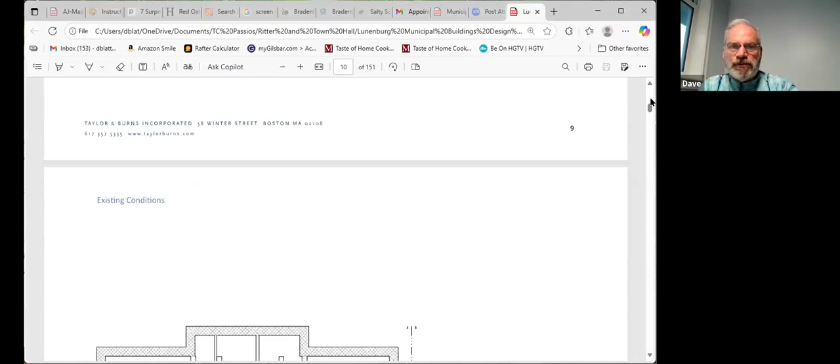All right, this is the way the town hall looks today when you walk in. You walk in, you have the assessors here, town clerk in the back, town vault. You come down the hallway and there's the treasurer and accounting departments in the background. When Taylor and Burns did their proposal on cost, this is what they proposed for the first floor of town hall.

You walked in, there was a conference room, an office, some storage, I assume for chairs and tables. You had a large 730 square foot conference room over here, and then a third conference room where the assessor's office is. They put in the elevator, more storage, the two separate ADA compliant restrooms and things of that sort.

My personal feeling is I don't need to change it that much. The only thing I might do is look at this conference room, because one of these offices could be Veterans Affairs, with a meeting room for Veterans Affairs in this general area. Hey, Dave, I think we need to keep Veterans Affairs away from Town Hall. There's no parking, most of them are ADA, and they're very, very loud.

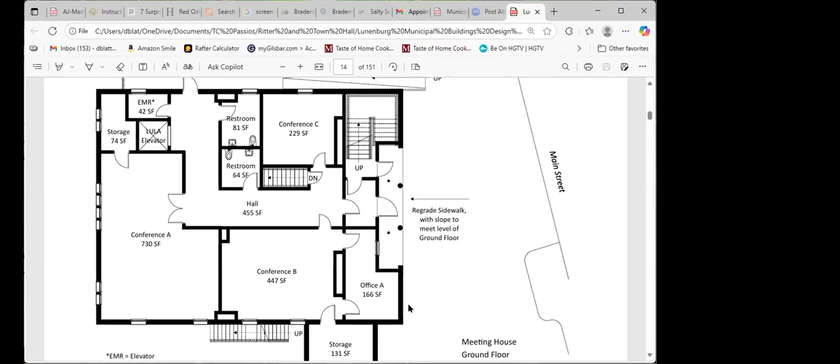Gotcha. Okay. Spoken from personal experience, about the loud part, not the other part. Yeah. Yes, it's a good thing I've been through all the HIPAA training because I hear everything. Okay. All right.

So office A, who knows? I still could see it as an office. Maybe it's a floating office, maybe for you, Chris, or if we still have to do something for our state rep. But I was looking at this as not really being much different. Anybody's thoughts or comments? I think the only concern would be if the select board is meeting on the first floor, does conference room A need to be bigger?

So Brian, the idea is that between conference room A and B, this wall moves. The wall gets stored away into this little cubby hole here, and you can have a large joint conference room. However, the other idea is that if you knew a meeting required that many people, we'd move it to a different building or location. Think about in your years on the select board, how many meetings you had with more than 15, 20 people there?

Yeah, probably, that's not fair. You're taking off the second glove. Thanks. No problem.

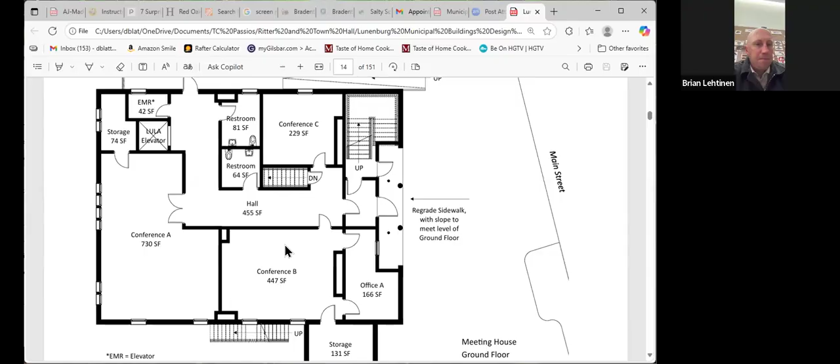So anyway, that was the thought. And the hall doesn't have to be this way. The configuration can be different, but I'm just showing a configuration that looked like it fairly worked.

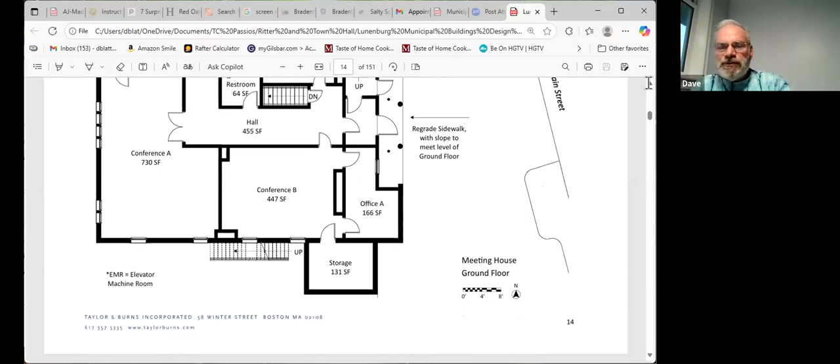If I go upstairs, any other thoughts on this first floor? I think, first of all, I don't like hardly anything that Taylor and Burns did because I think they just absolutely positively weren't very good at this project.

But I think one of the biggest issues is everybody has said we don't want a chairlift in Town Hall or Ritter. So I think the first thing you've got to do when you're looking at layout is where's the best place to put a new elevator shaft? Is it in the front of the building? Is it in the back of the building? Is it outside the existing footprint? I think that's the number one issue that needs to get decided before you can start divvying up space on the first floor and the second floor.

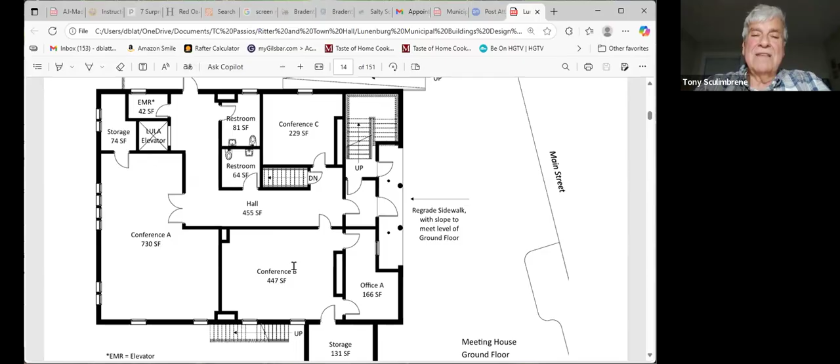Personally, I think the elevator ought to be as close to the front of the building as it can be, because the reason you're putting an elevator in there is to make it easier for people that are handicapped to get places. And if you bury the elevator in the back of the first floor, that requires them to travel to the back. In my mind, that is the first thing we should decide.

Okay, so if the elevator was in part of Office A, with the door opening to the breezeway, it would work better in your thoughts.

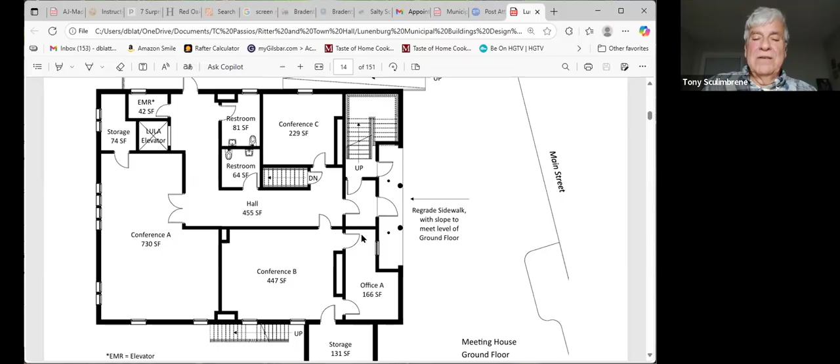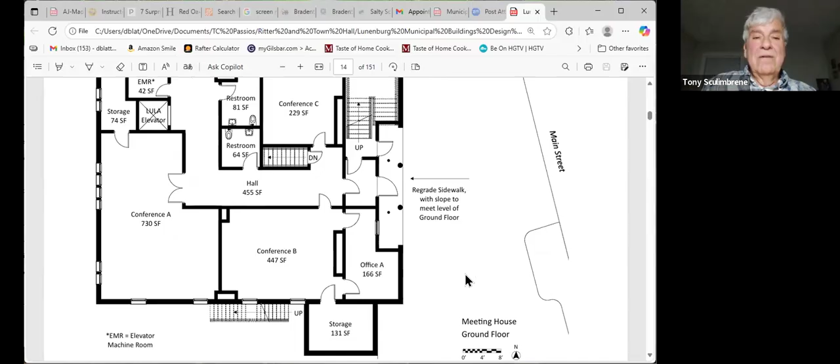Yeah, the other wild idea I had was to take the storage, which is the current town clerk vault, and modify that. I'm not sure what the footprint is, and I don't believe the dimensions are on these drawings, but could you start with that as your elevator shaft? In essence, we would be keeping the square footage at the ground level the same, but adding some square footage up to the second floor. But it's in the right spot, it's up front. Understood.

So as I said, guys, I'm just looking at this as a concept. I'm starting to try to move us into different concepts, different ideas, and just get us thinking about whether things could work or not.

Look, it could be that this wall between conference room A and conference room B is shifted way over to the corner, and conference room A is the first conference room when you walk in. There are other ways of skinning the cat, and maybe there's a conference room D if we needed it. But to me, it gives some nice size meeting rooms for different size groups.

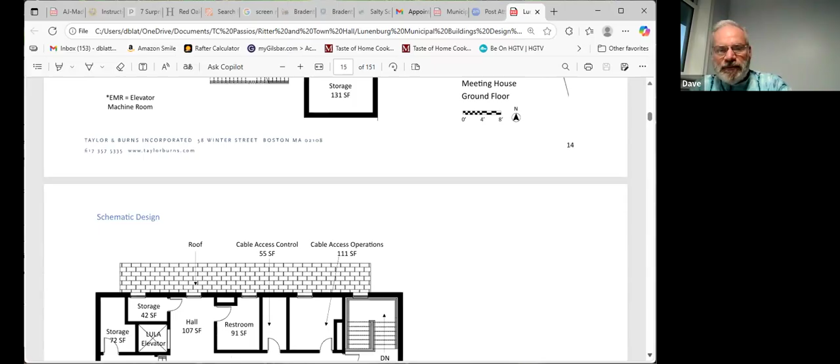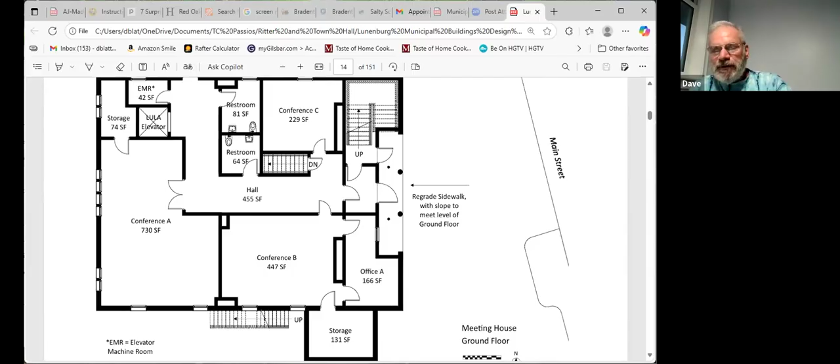If I go upstairs to the second floor, this is what they had and what they did. Once again, we're talking about what they did. They had the hearing room that's there now, minus the stage, and it is 1,350 square feet. Brian, to your comment earlier, if I add my 730 and my 447 together, I'm at about 1,200 square feet. So not that much different, but it is different. I'm definitely in that mode.

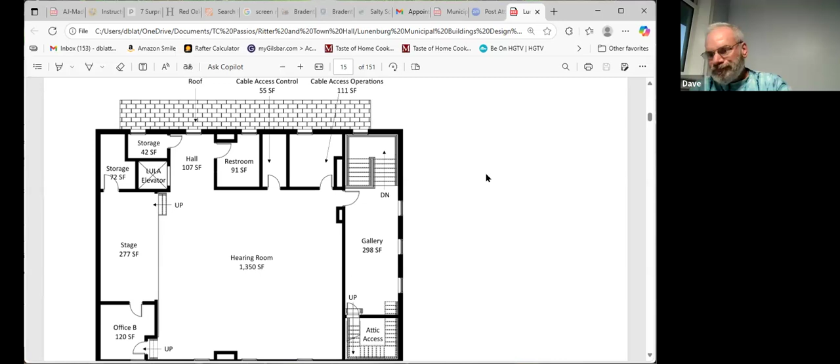They have the office, we have the storage, we have the studio for PAC. What is that other one? Oh, cable access operations. So it is what it is. This is the second floor, okay?

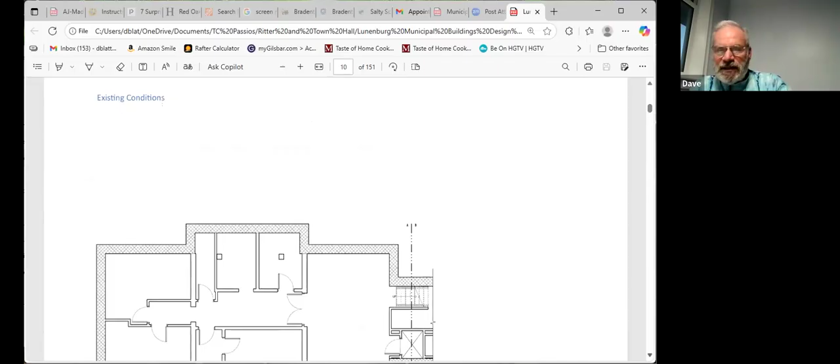If I move over to Ritter today, it gets a little bit more confusing. Oh, hold on, wrong direction, sorry. Okay, so here's Ritter today. Lower floor. I'm assuming Chris Ruth is down here. Veterans Affairs is right here. Am I right with this one? Yeah, this is the lower floor conference room.

Kitchen. What is this now? Mechanical. There are two boilers in there. Two boilers? Okay. And the important thing to remember downstairs in Ritter is a lot of these walls are load bearing.

Okay, so any reorganizing, we're just gonna have to take that into account. So literally, if they just stay as offices and just get reconfigured, we're okay in a way. You know, I have a conference room here. So this is the lower level.

Can I ask a question about the load bearing wall part? Sure. Is it load bearing to the structure above based on where the walls above it are? So if we reconfigure walls above it, we would also have to reconfigure walls below? The walls above it, if you remember when you walked around there, most of those walls don't go to the ceiling.

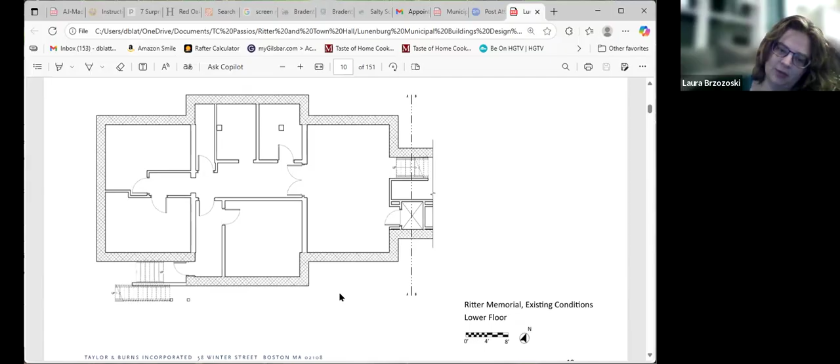And 2 or 3 building inspectors ago, he actually put all that in himself. So most of those walls can be just knocked down and moved. If they don't go all the way up, they're irrelevant. I think there's 2 main walls upstairs that do go all the way up that we'd have to look at. Okay, so it's mostly the weight of the floor and everything else. And we could reconfigure upstairs without having to reconfigure down, probably. Yeah, and we could reconfigure down. We just have to keep in mind that the more you reconfigure this, we're adding some structural costs there.

I mean, downstairs works. Chris, what is the floor structure? Is it reinforced concrete? Is it steel? Whether it's reinforced, I couldn't tell you, but I believe everything's concrete floors. Okay, that's what I was thinking. You mean the first floor, Tony, or the basement? First floor. That's probably just wood framed, right? I don't know, that's why I asked the question. We're gonna call that the lower level. The lower level is concrete. The first floor is wood. The addition's definitely concrete.

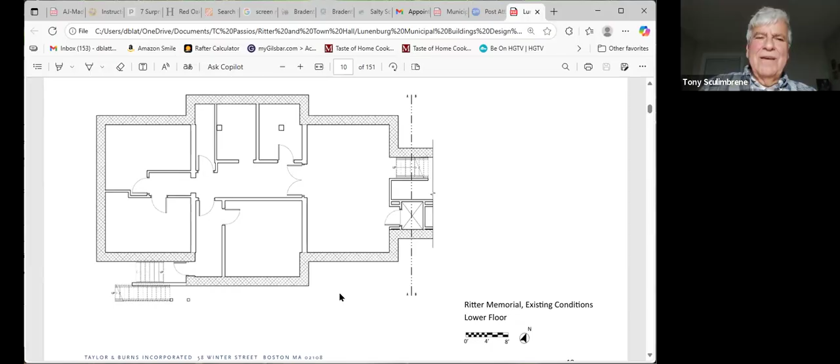The first floor, it doesn't feel like a wood floor when you're walking on it. It feels solid and smooth. Maybe it is a concrete deck. I wouldn't be surprised. I just assumed it was framed. That's a good question for us to verify, because it will have an impact. Yeah, I'll try and pull up a corner of carpet tomorrow and take a look what's in there.

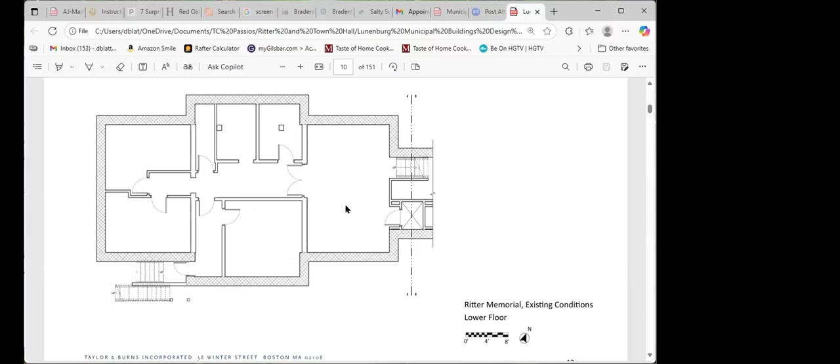Okay, and Chris, is it mostly the thicker walls in this picture that are load bearing? Or do you think some of the thinner ones on the inside will load bear? I think it's mostly the thicker ones because those are masonry walls. Yeah, those are probably the ones that are really load bearing. If you see in the top of this, there's 2 little boxes. Those are actually columns. Okay. Oh yeah, because that would be the outside wall of the building.

Is that drop ceiling in there downstairs, Chris? I can't remember. It's hard ceilings. Okay, yeah. All right, so that's the lower level.

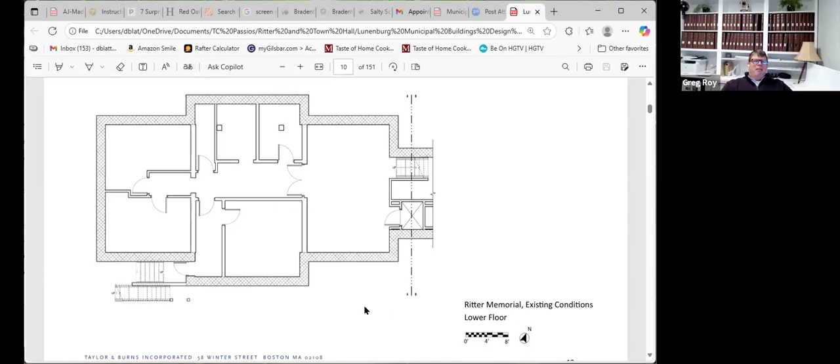We're calling it the ground floor, but this is the addition. Let me make it a little smaller so it fits on the screen. So this is the planning board meeting room, land guy, the admin office, the 2 bathrooms, and then the open area with the little countertop and the copy machine. So this is the ground floor of Ritter as it stands today.

Remember that I think it's 5 steps that you have to go up, 5 steps that you have to go down to get to either levels of the other building, and there's the 5 steps to even get up to the level of this Ritter.

Ceiling heights in the lower level, are they okay, Chris? Yeah, they're actually fairly tall for being in the basement. They're not bad at all. I wouldn't say meeting room for select board, but for offices it's not bad. No, not bad at all for offices, and I actually think the ceilings were built down more than they used to be, because in my office the windows swing in and they don't open because you hit the ceiling. Oh, that's right. The old wonderful dropping of the ceiling to add some pipes.

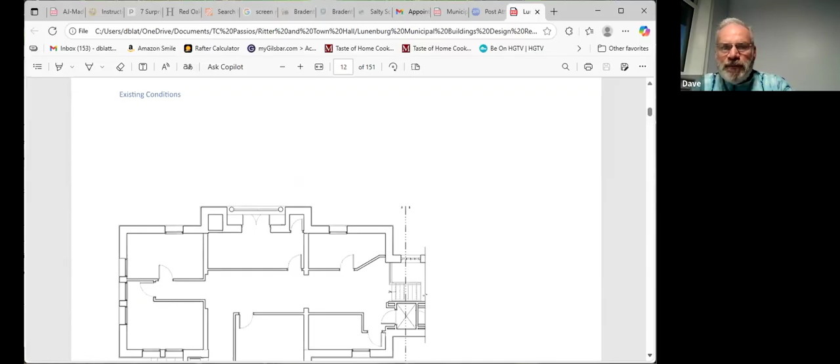All right. If I move up to the upper level, this is how we have it now. You come up, there's the deputy building inspector here. That's storage where your mouse is right now. The first office you were on was the rec director, which is currently vacant.

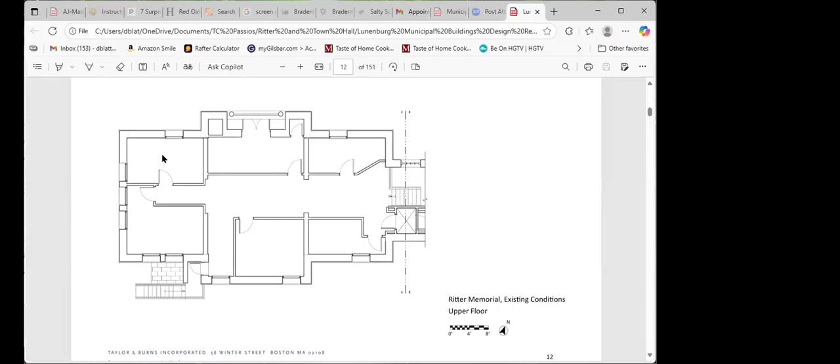The office to the left of yours is Brian's, where the fireplace is. Yeah? If you go straight up from there, that's the building admin. That is vacant until Wednesday. And then Board of Health and Conservation's the last one. Okay. And those thicker walls again are the load bearing ones that trace up from downstairs.

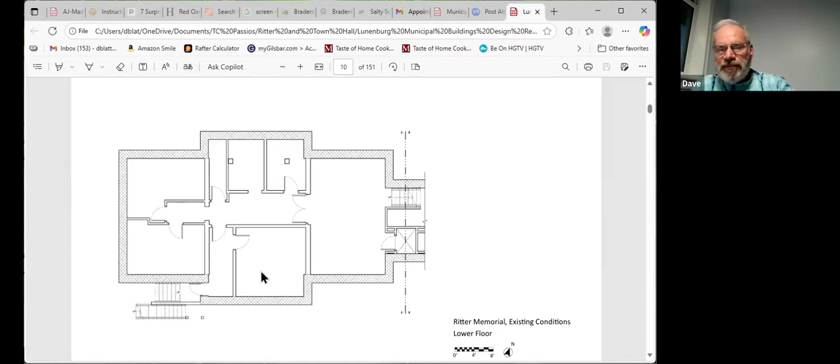Okay. Now, guys, one of the things I'd like us to consider as we look at this thing is that this is the land use pretty much that the town manager spoke about. It's the same footprint as the lower level. Right now, it is. The only thing we're missing out of this is the director, the land use director's office, and his admin. But other than that, you have conservation, Board of Health, building admin, and things of that sort.

So just as we're throwing things out here. As we move to the second floor, we talked about the offices with the fireplace. I would love to see that become a conference room, for when you want to really show off Lunenburg, and it would be a beautiful conference room. You have room here for the town manager, her admin, whatever you want to make here. I can see this being a common kitchen area or smaller conference room and other things.

And then, what we're looking at mainly to me is I'd like to see a 2-story annex on this side, on the opposite side of the present annex, that matches the floor plan, that matches the heights of the floors in the present Ritter, built on the other side, in the green on the other side.

Dave, if you do that, you create a problem with access because of the '65 addition. And that was the fundamental mistake that Taylor and Burns never addressed as an architect. And it was why we had an elevator in the new building in the annex and a LULA where the current LULA is. So Tony, I am eliminating the 1960s building completely.

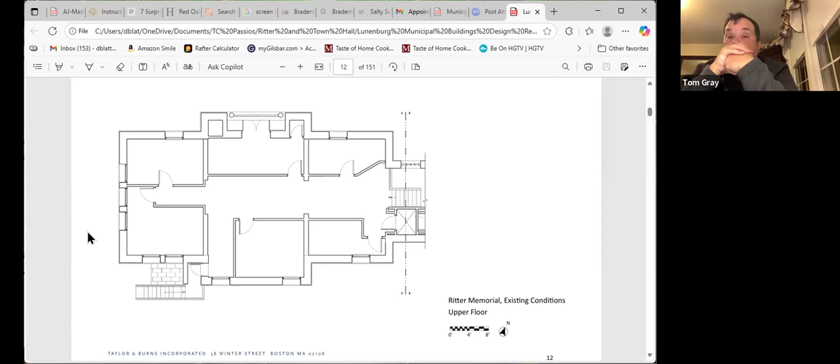And what's interesting about the annex is that it has good, strong, stout walls that are very high. If you look at the ceiling height in the addition, it's probably 12 feet, if not more, which is one of the contributing factors to why poor Marjorie and all the other assistants who have been in that space are cold, because we replaced the baseboard heating with mini splits that are at the top of a 12-foot high wall.

If you tear down the addition, you could have a single elevator to the south of the Ritter building, but you don't know what's over there. Whereas if we concentrated on keeping the addition, we know exactly what's on the addition side. You could do so much more by looking at how do you make the building completely accessible in one spot, starting with the '65 addition.

Now, this is something I tried to make this point when we were dealing with Taylor and Burns. I'm not a proponent of saving the addition for any historic reason. I just look at the '65 addition as a place to bring this multi-level facility up to ADA compliance the easiest, quickest, and cheapest way to go. But Greg, so you're a civil engineer. What do you think of that idea?

Yeah, I think it has merit. So correct me if I'm wrong here, Tony, you're saying, if I'm understanding you correctly, doing what we need to do for the building modification in the footprint, or maybe not the exact footprint, but in the area of the '65 addition. So maybe that needs to be 2 stories, but we do it on that side. That's what you're saying? Yeah, yeah.

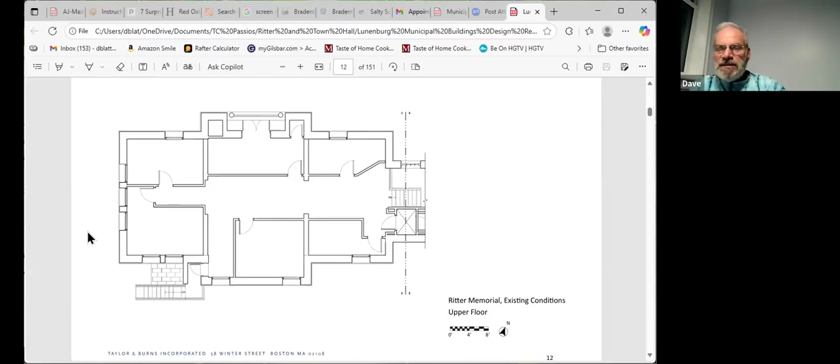My only concern on the annex is that I'm looking to eliminate steps to get into the annex and eliminate the stupid transition of floors from the annex to the Ritter. If the annex as it sits today, that floor can be altered in height, and we keep the building, I'm all for it. But if not, that floor that sits today needs to go, and it needs to be equal to what the Ritter is today on both floor heights.

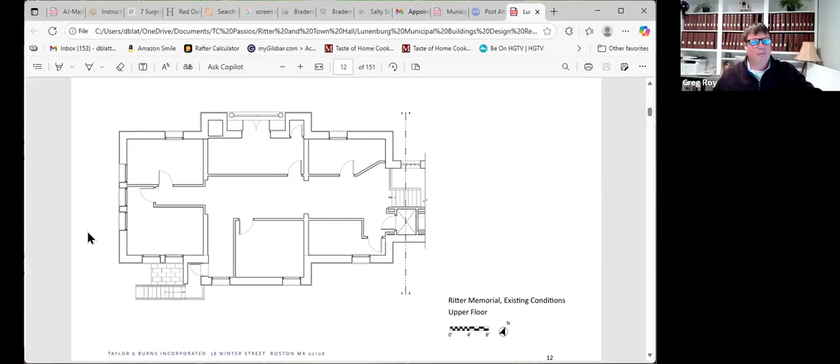Tony, I haven't really looked at that. Do you think that you could make the grades work? I'm assuming you mean put a basement in. So if we were to, just hypothetically, take the annex off and reconstruct it so that we have a basement in it matching the existing basement, is that what you're talking about? What I've been saying is you take where the steps are, going into the building, over towards the property line that's to the east, and you cut that part of the building out. You cut out the steps that go up, and you cut out to the point where the steps go down and then go up.

You get rid of all of that. You have a major demolition so that basically all of what's on the screen here, you take off. Yes, okay, I'm with you. Yeah, you keep it, so where the bathrooms are, that might be where the elevator is, and where the steps and the double doors are, that may become an entry at the same grade as the lower level into the building. Okay, that's what I was asking.

Because here's one of the biggest issues, Dave, why I want to stay on this side versus going to the southern side of the building for the annex. Everything that you do over there requires an excavation below grade, whereas we know what the conditions are right now at the entry level, where the parking lot is. There's no digging that has to be done to get to that level. You could be at that level just by removing foundation walls to get into the lower level of the Ritter building.

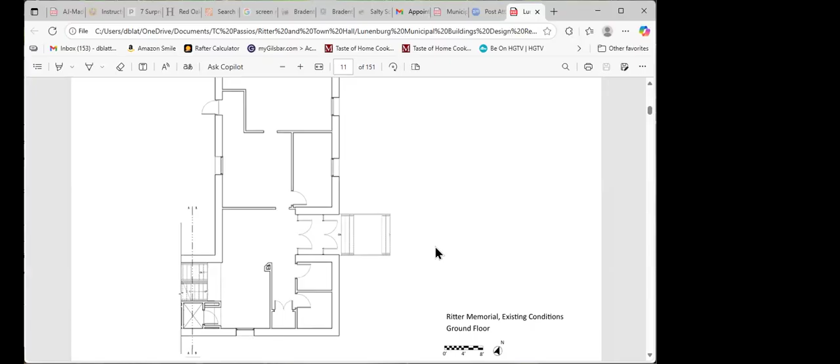I think the other thing we need to remember, guys, is we need to pick either the lower level or the upper level that we want to be level. Any new thing that we're going to attach to it, the height from the basement to the first floor is never going to match. So we're either going to have a ramp in the basement or on the first floor. Yes, absolutely, that's true.

I feel like the 1960s annex right now locks us into this 3-level multi-tiered thing where you're going up 3 stairs to go into the building, and then you'd have to go down 5 steps to get to the underside, whereas if we were to replace that annex with something, we would mitigate this multi-tiered level issue, and it would be a simple elevator that has a stop at the first floor and a stop at the second floor.

You still end up with a building that has 3 different levels, Laura, whether you're on the right side or the left side. Why? How? Because you would want to enter the annex at grade, and you can't. The addition is at the general grade of Ritter. And this is the reason why the annex had the sloping hallways and an elevator on that side, because we didn't address the fact that we still had a piece of the building at grade on the other side.

But no matter what you do, if you tear down the annex that exists today and build a new annex, if you want people to walk in there from the Mass Avenue level, then you are guaranteed to continue to have a structure that's got 3 distinctly different elevations, 3 different floor levels. You don't get away from it. And that's the reason why I'm saying let's use what we got, because we're not going to change it by switching it to the south side of the building.

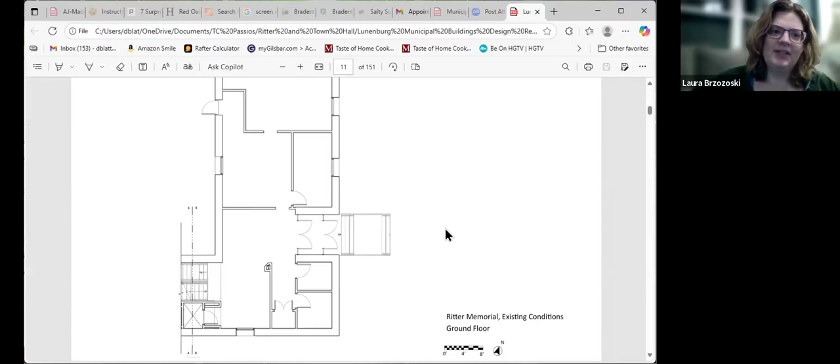So what I'm saying is that it's not at grade, and that we could have, if we sunk down the annex magically, sunk it down those 5 steps, now we're level, and you put a second story on top, which is also level. Yeah, well, to Greg Roy's point, you might not be able to be level. You might have to have a different floor.

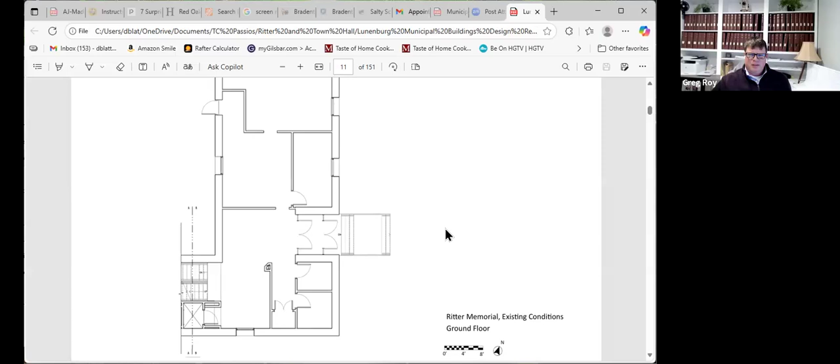But one step up is different than, how many feet of ramp do you need to go 5 stairs? Is that 36 feet? You're making it complicated, Laura.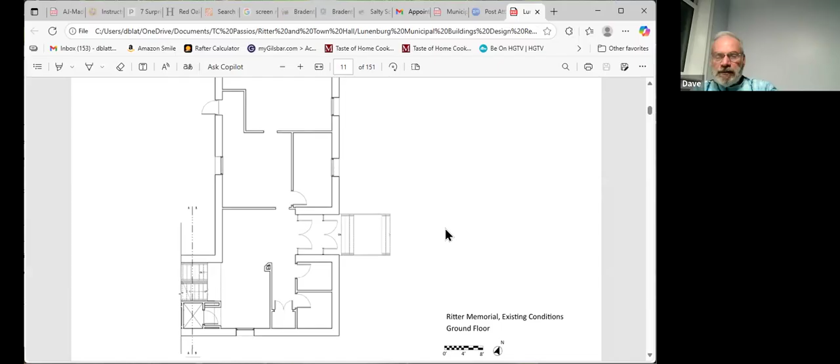Just think about where's the best place to put an elevator to get to 3 levels. 2 levels, no matter whether you have an annex. No, 3 levels. If we take the annex out of the picture, it's too low. You can't do the annex at grade on the south side. Why not? Because of the terrain. That's the issue. You go up 5 steps to get into the building.

This is the reason. If you go back and look at the Taylor and Burns drawings, when you walked off of Mass Avenue and you went into the annex, the only way you could get to the lower level was to have a ramp or use an elevator. Or to get to the upper level, you had to have a ramp or an elevator. Is that not correct, Greg? Yeah, that's true.

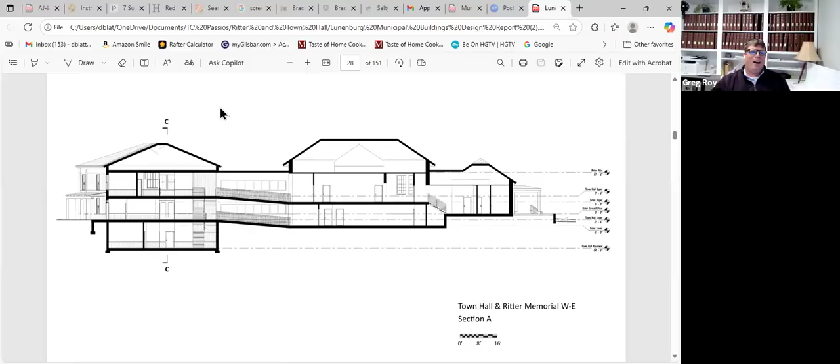I have the survey pulled up here that we did. The parking lot level, at the pavement level going into the current Ritter entrance from the parking lot where there's no ADA accessibility, I could tell you what the elevations are, but it's not gonna mean anything. It's almost 4 feet lower than where you go into the annex. And then you go back down the steps to the basement. But to Tony's point, you go up another 5 feet to the first floor.

And on the far side of the building where we had the annex before, the grades over there are like 6 or 7 feet below. So you have this problem, and you don't have the ability like we do on the annex side, where you could lower the grade to get in on the basement level from the parking. You can't really do that on the other side because of the way the grades are. Does that make sense? So if we put the addition on the other side, you're still gonna have this problem with access into the building on a split level type scenario, as far as I can tell.

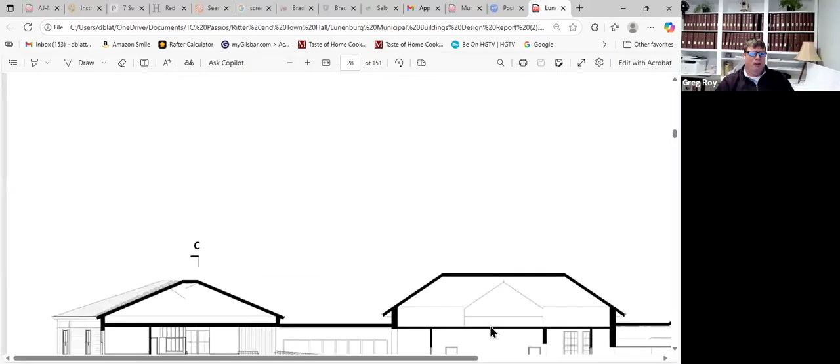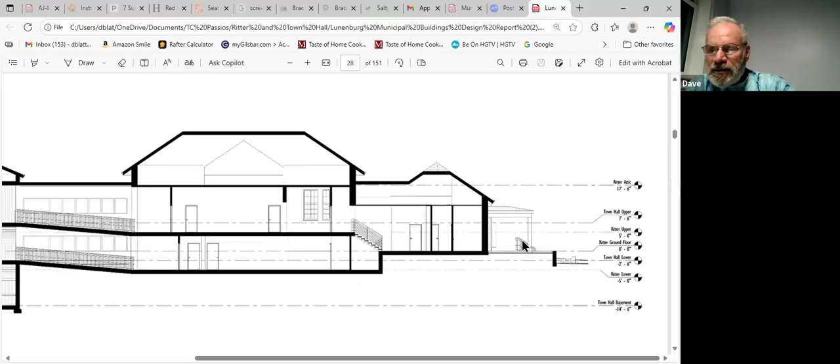Bear with me, guys. I'm gonna playfully disagree. All right. So right now, you're damn close, okay? The town hall lower level right now, they're saying -5 feet from what they were gonna do, but they had steps to get in. So I'm looking at this thing and I'm not that far off.

So if we dug down the parking lot on the current annex side, the entrance area there, if we dug down another foot, now we are at the lower level. I think you could do it. You'd have to look at the grades of the parking lot, but I think it slopes down. I think you'd have enough elevation to get that to work.

That's what I've been wondering. Oh, sorry, Laura. I'd be worried about drainage and putting what is essentially a basement on that floor, but I guess if there's gonna be flooding issues at Ritter, we would have already seen it. But if we dug down that parking lot and created a lower grade and made that the main entrance, some sort of corner thing, then we would have a new annex where the entry is at the lower level of Ritter, and the upper level of the old Ritter building is now the second floor.

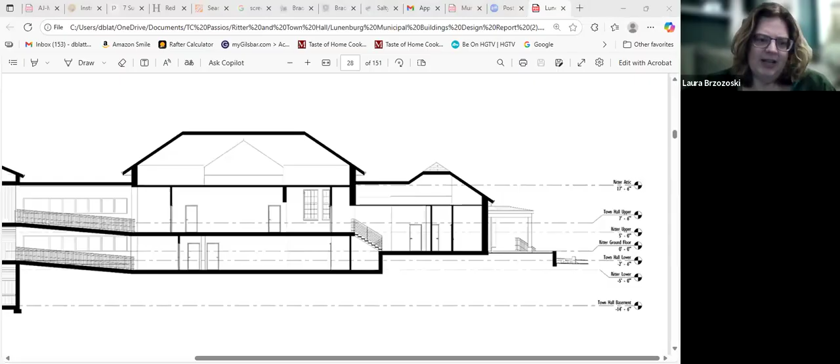And from these, it looks doable to me, but I am not a construction person. I would take Greg's word on it. But if we dug that parking lot out, we would be entering at the lower level of Ritter. Well, I think the grades are probably doable. The parking lot does slope over there. I think what we're not paying attention to is this annex side. There's 6 parking spots there, and they're tight. They're awful parking spots.

So even if that was true, the main entrance, what do we do about parking? You give up those town hall parking lots. Well, it'd be ADA only. Yeah, ADA, because town hall already has suboptimal parking. Yeah, those would be the handicap spots and we would have to find more parking. So that is an argument for putting it on the other side.

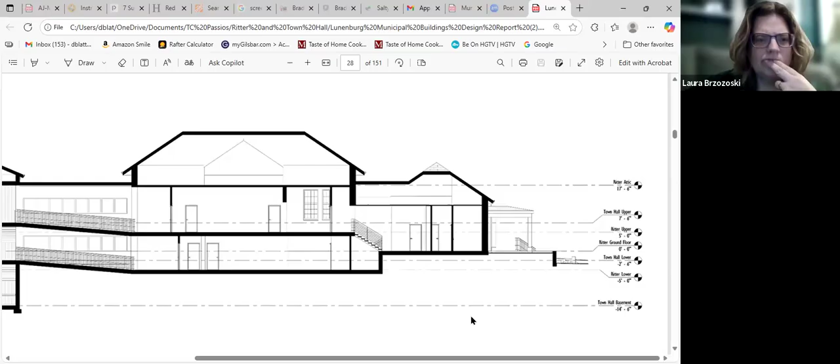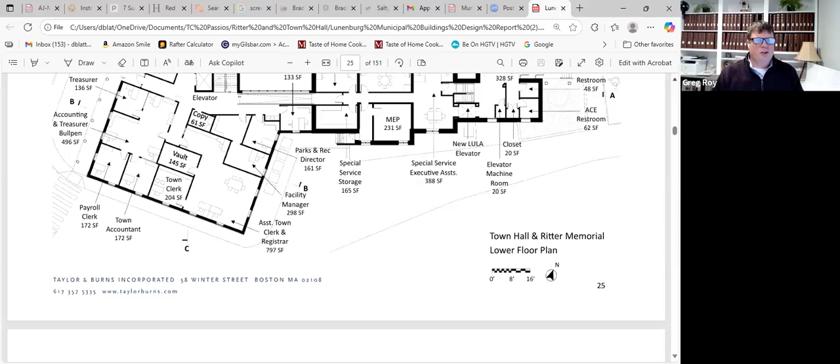On the other side, I would argue that grade should be at the second floor. I don't know why. Why didn't Taylor and Burns do that? Because it related to how it tied in. The annex was huge. And it went all the way out to Mass Ave and the School Street entrance, where School Street comes into Mass Ave. And in order to get the grades to work at that point, essentially, they tied the grades into the sidewalk right there. And so when you work that backwards, it comes in at midship, if you will, mid story.

Greg, is it better to raise up or lower down? Well, it depends on where you are in the building. If we were to do the other side, leave the existing annex the way it is and put the addition where we were planning it before, at the level of Ritter's, we're losing that stupid ramp. I don't think there's a feasible way to do that. You'd have to overcome like 6 or 7 feet of existing grade. I'm just gonna tell you what it is.

Sorry, 7 feet? Yeah, the elevation is really on the School Street side. The elevation of the grade there is roughly 575, so it isn't 7 feet, it's 574.8. And the threshold elevation, the second floor elevation, the top floor of the Ritter, is at elevation 580.6. So it's almost 6 feet. There's a lot of grade, and then it actually gets lower as you get down to School Street. So there's a lot of grade you'd have to overcome to only make that on that first level. You know what I'm saying?

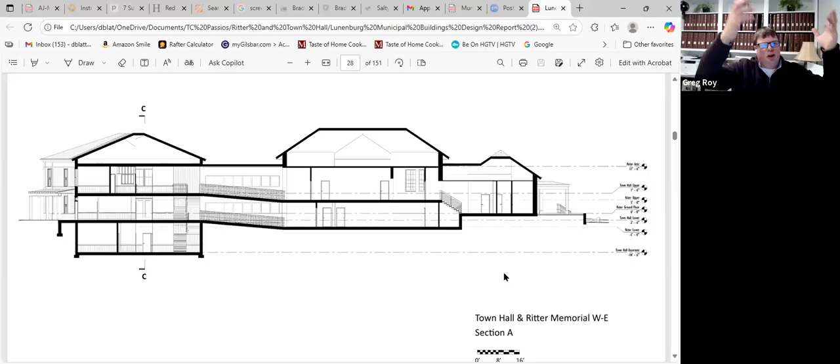And then you also don't have the ability like you have on the other side, where Lancaster Ave is quite a bit lower. It's probably, I venture to guess, a couple feet lower than the basement elevation of Ritter. So you would have an opportunity to regrade that parking lot and come in at the basement level with your front entry door, ADA, right in. And then to Tony's point, you could put your elevator in there and go up. Maybe you wouldn't do a full basement all the way and you'd keep some of it at grade so you could do a multi-stop elevator. That's what I was thinking you would do, Greg. It's certainly possible.

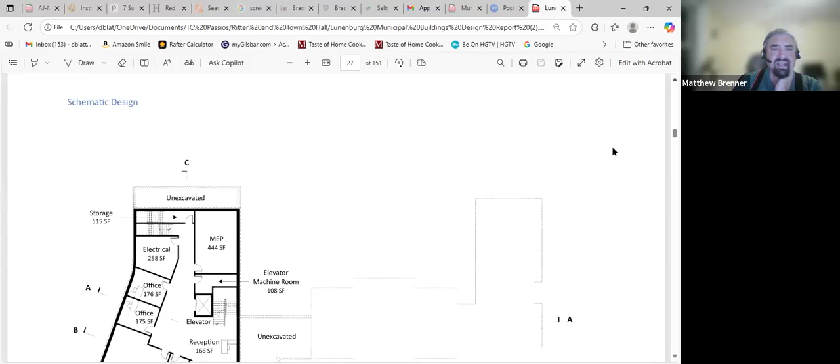And I see what Tony is saying for sure. We wouldn't be able to put all the parking over there. We'd have to have parking on the School Street side and another way in for folks from that, an employee entrance or something. Ideally, there's one entrance. Well, there'll be more than one entrance. Sorry, go ahead. One main public entrance is ideal. I understand what you're saying, Laura. We could have more parking than there is now, though. I mean, Ritter has 7 parking spots in that front area.

And there's no reason it has to only be 7 there. The parking lot could be bigger. And I mean, some of that parking lot layout is just limited right now by the current entrance. True, we could, I think, at minimum work in 3 more spaces without notably increasing the size of that parking lot, except in the areas where it's now a little stone wall, the retaining wall for the dirt and everything. That's probably true.

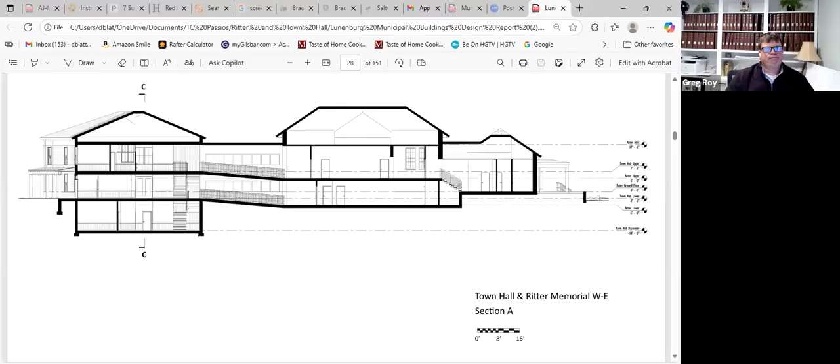If we made that parking lot even bigger heading towards Mass Ave, we could probably work in more. It wouldn't be all the parking for the building, but we could have a real amount there. It could be public parking though, like the employees would have a different entrance. And that's honestly ideal as well, if employees have their own private way to come and go and sneak out away from the public. And they can park in the back where it's a little more private.

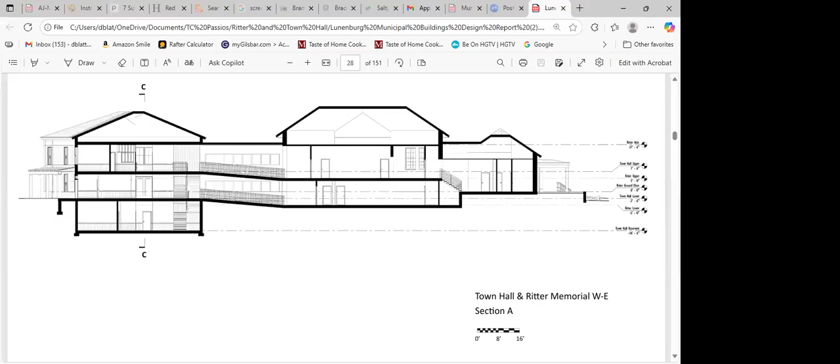Hey, Greg, I got a question for you. Grade-wise, looking at what's on the screen right now, the whole new addition. What if we lowered that thing and had almost like a basement retaining wall around it and just sink that whole building? Then you definitely have a drainage problem. Because of the grades, Chris, you don't have any place to wash that out. You'd literally be creating a well.

Yeah, and we'd have to. We could resolve it with pipes to catch the grade on School Street by where the old primary school was. But I don't like it because you'd be relying on pipes and those things have a tendency to clog. And without a big earthwork effort, you'd really have an issue, I think. Tony.

It's the wrong side because of how high it is in relationship to Mass Avenue. We're trying to bring people in at grade off of Mass Avenue, and it's the wrong spot to do that with this weirdly configured building that we have. And we would just duplicate the same split level if we built the annex on the School Street side of the building. Dave, I think there's 2 big issues here. One is how do you minimize having multiple elevators or chairlifts, given the split level design that we've been stuck with.

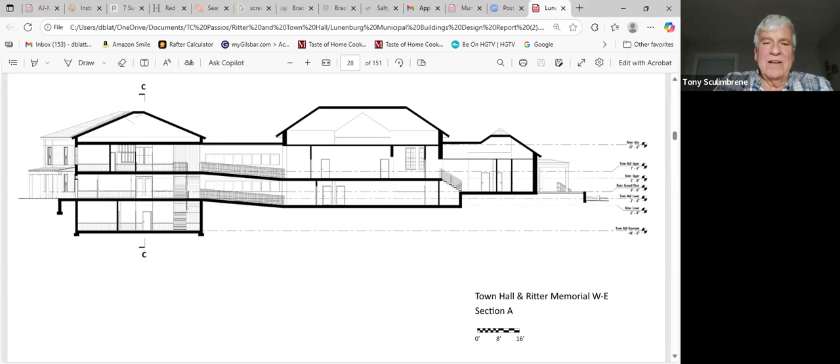So I think we ought to try and figure out, Greg, how do you have your elevations? Are those something you can electronically share? Yeah, I could. But I think it would be good if we had a little focus group, and maybe the town would be willing to hire an architect to do some conceptual work on which side to do our access and where to put our elevators. And I think that's the dilemma.

We want to have an elevator so that people can go to Ritter, to upper level Ritter, and a Mass Avenue street level. And that would be the design challenge we would give the architect: where should this elevator be to satisfy a need to get to 3 different levels? And then the second thing is going back to Greg's comment about space utilization.

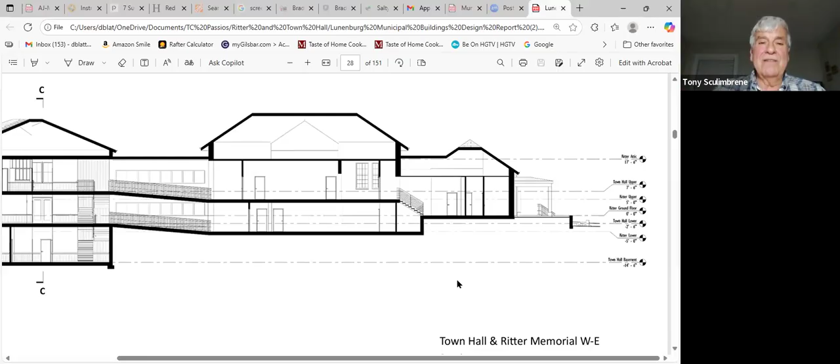When we were touring with Jennifer on Thursday, she was making all kinds of comments about where this person could be, where that person could be, how that person could be configured. And I was thinking, wow, I wish we had somebody here taking notes, because we're going to have to go back to this.

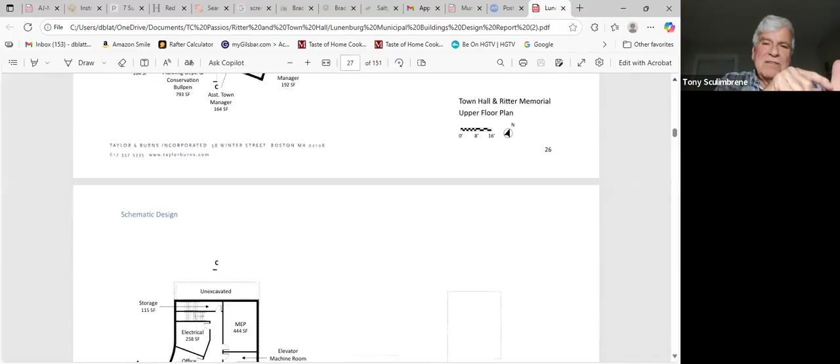And one of the things I was thinking, she really needs to sit down and just do a bubble diagram layout, nothing with walls and dimensions, but just to say, this person sits here and that person sits next to this person. And ask her to do that so we could have something to look at and figure out how to use these buildings.

Tony, can I ask a ridiculous question? Has anyone ever raised a building like this? Like taken the actual old Ritter itself and raised it up?

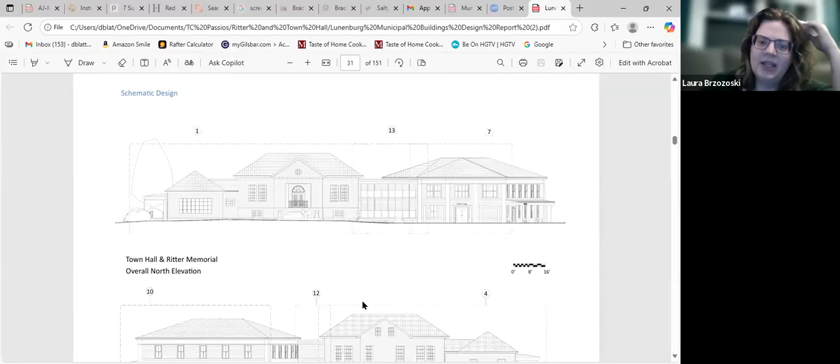Well, it's called Town Hall. Town Hall was a one-story church. No, I meant take the actual physical building and bump it up 3 feet. Yeah, they essentially did that with Town Hall. They put it on a foundation and they put a first floor on it.

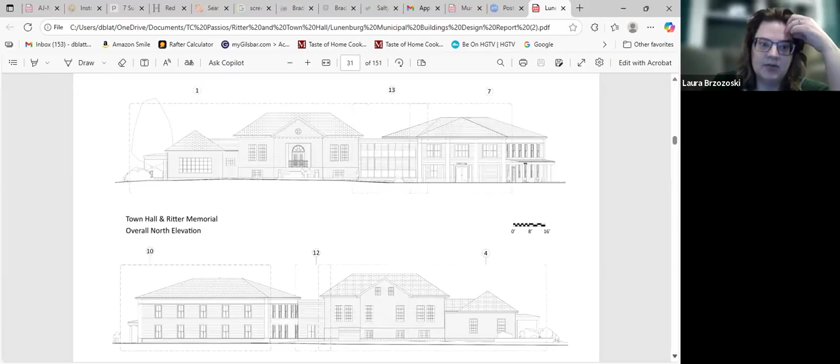But that building is built entirely different than Ritter; it's not masonry and stuff. Yeah, usually those aren't great at being moved. It's possible. The cost is gonna be the question. Anything's possible. I'm just wondering because that would fix a bunch of problems. It sure is funny, huh? How it's set up so high like that. I mean, they would have made our life a lot easier if they just set it about 3 or 4 feet below.

Yeah, and the other thing, oh, go ahead, Tony. Sorry. It's the reason why the addition was built the way it was. Because you could walk off of Mass Avenue and you'd be right in the building. And then you have split steps to go up and down versus having a lot of steps to go up and then a lot of steps to go down. That's the reason why the addition, but it wasn't done with any kind of ADA in mind. No. In 63, that didn't exist.

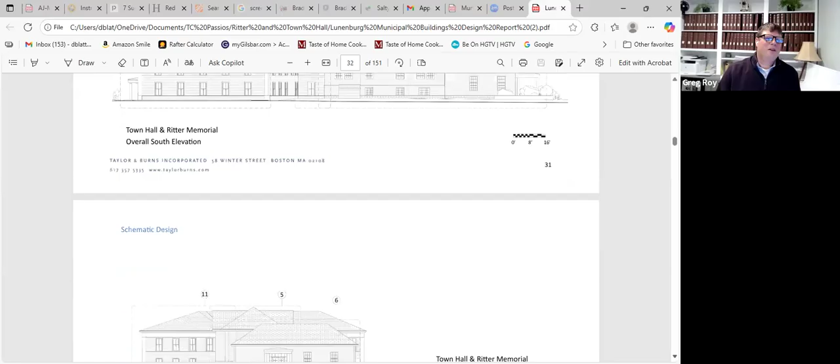Well, I mean, it does. It's got the ramp that comes in from Mass Ave, I guess. But not from the. So the other thing, nothing for nothing, it sure would be nice to reutilize the old entrance too. But I know it's probably not going to happen because of the way the elevations are, but it would be nice if we could use it the way it was intended.

You know, Greg, it was the one thing that Taylor and Burns did that I actually thought was decent. They did a kind of a landscape replication of the entryway. That was the only thing they did where I thought, well, there's some good architecture. I really liked that feature as well, the oversized steps that would be seating for the public and reminiscent of the stairs without fooling people into thinking they're stairs. I thought that was a really nice hallmark.

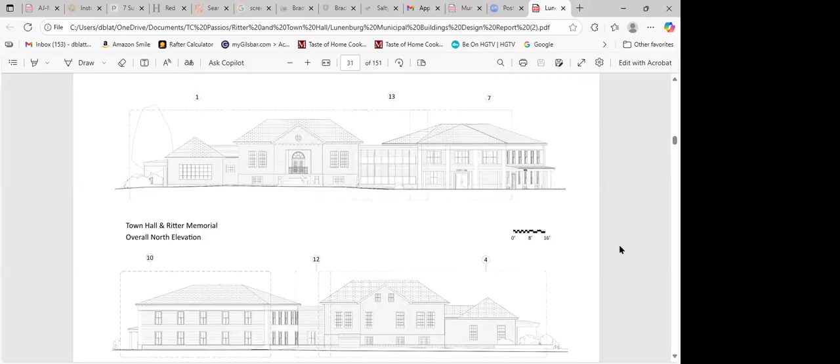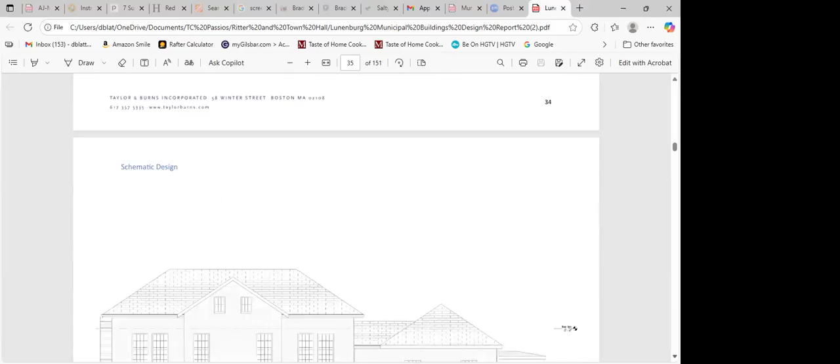Could we just put the elevator in the annex part and it could go up to those different levels still? It could go to the basement, the first level, second level of the Ritter? If you put it close enough to the stairs, is there enough room there? Because there is not a ton of connection between that building. You mean using the elevations as they are today, Brian? Yeah, the elevation of the Ritter as it is now, put the elevator in the annex and maybe add another set of stairs, in the back of the annex. An elevator with 2 sets of doors.

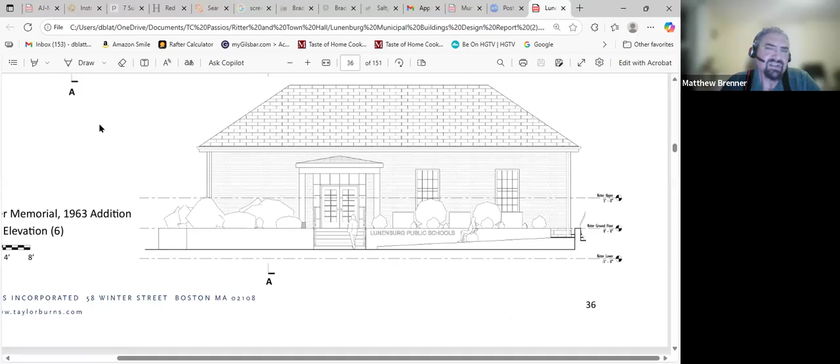While we think of that, I think it's worth noting that one, that would be a more expensive elevator. Two, I would encourage us to consider true accessibility. If you are mobility limited, you're still looking at a scenario where you're going to be using an elevator more than would be necessary if we did put things on a level playing field, as it were.

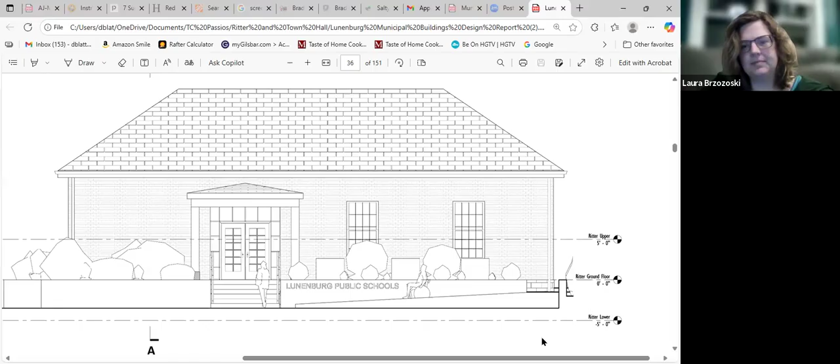So the big question for me, guys, is how deep that foundation is in the annex. I got this picture. Am I still sharing here? Yep, we can see. In here, it shows Ritter lower level 5 feet below Ritter ground floor and 5 feet above. So that's 10 feet. So you figure 9-foot ceilings in the lower level of Ritter.

I don't want to use basement. I'm going to use lower level of Ritter and upper level of Ritter. To me, I have no issues, but the idea would be, is that annex built so that we could get rid of the stairs on Lancaster Ave? And that's a simple question. It is. Or make the entrance on Mass Ave or something like that, and use that whole side for more parking and things like that.

But is there a way of making the annex the same level as the Ritter? Well, if you redid it, but I think going into the mid floor on the Ritter, that's a slab. The real problem is Mass Avenue, right? We're trying to get an entryway at the same level as Mass Avenue, and that's what the old Ritter was built to split that elevation. That doesn't go away, no matter where you put the annex, on School Street or on the Lancaster side. I think the Lancaster side's the easier place to do it.

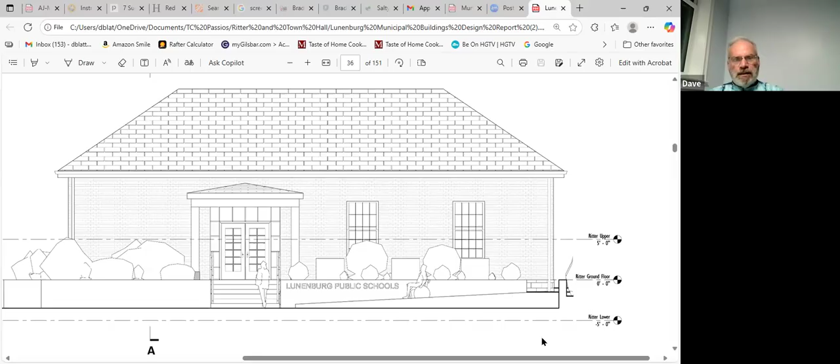So, like I say, I'm open, and I'm really excited about the discussion we're having tonight because I think this is the nitty gritty stuff for us. But Tony, I think you could probably rip off the current annex and just build a 2-story replacement, right? Don't you think you could do that? You could, and it would address what Dave's saying. The only reason I say you could do that is it would maybe make it easier, but I think it's more expensive than it needs to be, Greg.

Looking at the screenshot that's before us, where the entryway is, if you got rid of from the entryway to the left on that shot, and played around with the 3 levels that we're stuck with, knowing that the Mass Avenue level is the current level for the addition, I think you can get to lower level Ritter, to the intermediate level of Mass Avenue, also the addition level, and then to the second floor level of the Ritter. That's one of the reasons I would say we should look at whether we can reuse that.

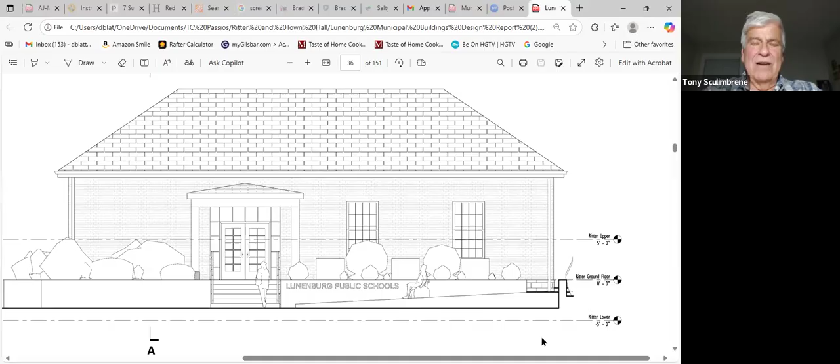There's 2 places you can go to get more square footage if you need it. You could bring the wall on the addition that's closest to the School Street side over to the rear corner of the Ritter building. Yeah, I see what you're saying. And then now you've got rough square footage at the Mass Avenue level. You broke up, Tony.

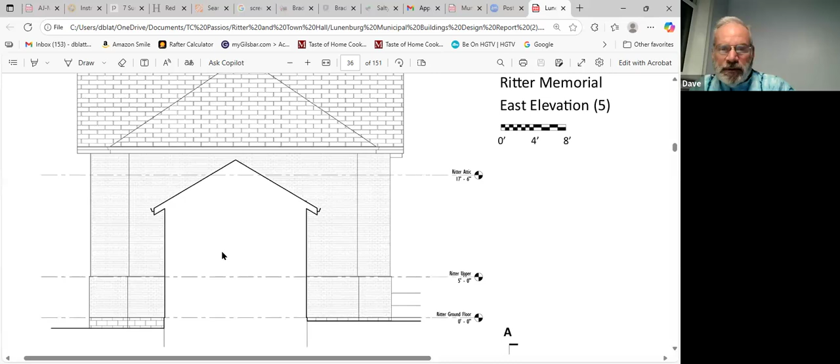You froze a little. Okay, so Dave, can you bring me a front picture of Ritter? This is the east elevation. Isn't this Mass Ave? No, I don't know what that is. East elevation, that's Lancaster Ave. I'm not sure what that is either. Oh, that's the entrance. That's the entryway, that vestibule thing they were gonna build.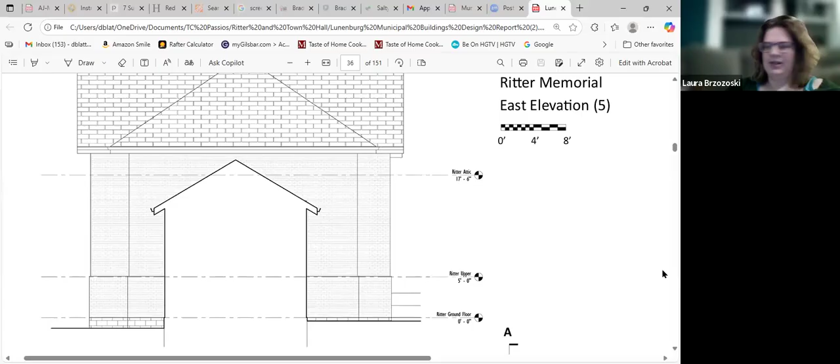I think there's ways to do it, but once again, this is complicated, and I don't want to say that we can solve this on a Zoom call. Okay, so this is the back. I want to see the front, if you can bring the front up, Dave.

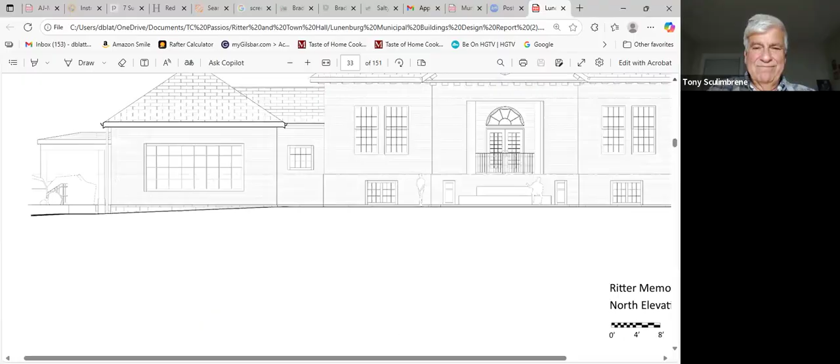Okay, there's the front. All right, so see the big picture window on the 65 addition? Yeah, that right there. See the wall line and that window. You could bring over that wall, cover up that window, and get more square footage in the annex. In fact, what that might become is a hallway, that would allow you to then have full utilization for public uses on the ground level, on the Mass Avenue level of the 65 addition.

And then if you needed more space, then you would just disassemble the roof and build a new roof with the roof line coming over to a wall that connects to the corner. Yeah, bring that up. You wouldn't have to bring it up much, because right now that ceiling height in the addition is at least 12 feet. This isn't the current? This is the current, existing. It is. And in fact, that wall on the addition, there's actually an access door for people to get into that side of the building.

If you look at a floor plan, you'll see that there's a doorway right where your arrow is, Dave. That's the handicapped entrance. That's the ADA entrance. Is that really the reason why? Yes, because it's the same level as Mass Avenue. Well, it's not even truly ADA, but it's the way they get in. Okay, so that's ground level. Yep, it is.

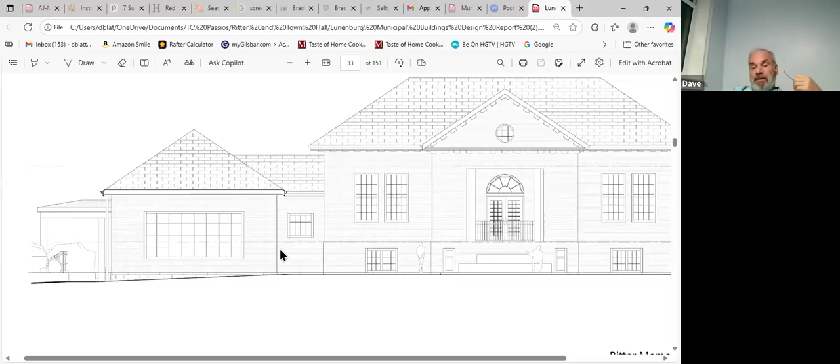I hear you. I'll tell you, to me, the Ritter building has more historical context in Lunenburg than Town Hall. To me, Town Hall was a building that the church didn't want. Lunenburg was so cheap at the time that they said, okay, we'll make it a town hall. The Ritter was the only building built in this town that really showed some wanting to do something really nice. And I hate to see that go away.

Does it go away if it's privately owned? It still remains an H.M. Francis building that is on the historic register, correct? It's just not one we own. I'm not hell bent on the idea by any means, but I feel like we're really working hard to put a circular peg into a square hole. The school on School Street was for sale for a long time, and we had no takers on that. And 925 Mass Ave, we've had no movement on.

I cannot stand the thought of more vacant buildings in the center of town. It sends an awful message. When I moved here, it was in that in-between time when the library had moved and Ritter was a vacant, empty building. And it really sets the tone for the town. Having town government functions in the historical center of town at the top of Turkey Hill, where a lot of our traffic passes through, I think symbolically is important, that our center of government is visible and open to the public and not just a commercial building somewhere.

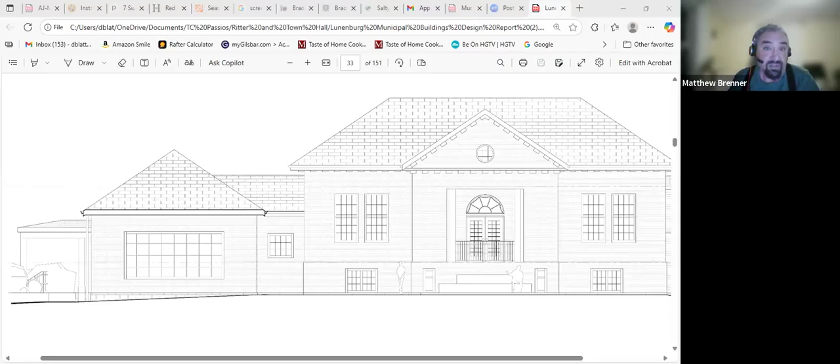Unless we voted you chair, then you're in. Well, then I would set the agenda, but I still don't have more than one vote on anything. I'm just kidding.

We could still consider, there is the parcel on School Street that we have. There is a big flat empty space where a big school used to be, still in the center of town. The issue I saw, guys, was that the cost of a new build was asinine. When you're talking about $500-600 a square foot for a new build, there's no way we can make a cost-effective new build.

Hey, sorry, one second. I hate to say it. I mean, look, it'd be great to have a new building, blah, blah, blah. But the fact of the matter is, that's what we ran into the problem with the annex. The cost of the annex was 4 times the cost of renovating Town Hall and Ritter type of thing. So okay, I'm looking at the hour.

I've loved this discussion tonight, guys. I think we've done great. It's been a great discussion. I'd like to continue to investigate this. Put your heads together. I can send you the report again, and take a look. Maybe there's a way. Think about the annex. Maybe Greg, pass on the elevation information. Let's think about the annex, clean it up, and let's see if there's a way of making it work.

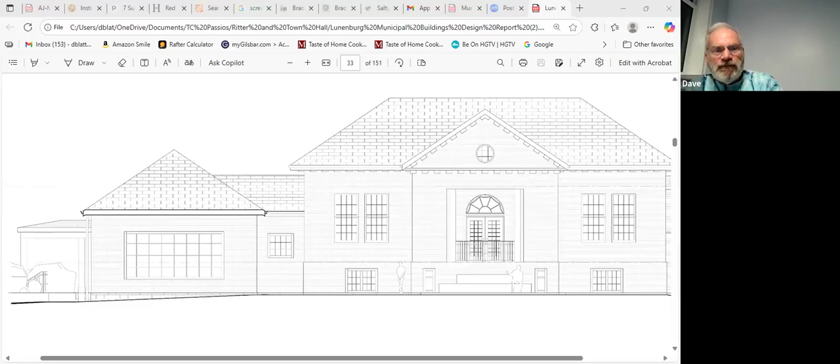Maybe the idea is that the second floor of Ritter on the School Street side becomes the entrance. And you go down, you take an elevator down to the lower level for certain town offices. I don't know. Or, that's our split level. It's 2 stories on that side and two different stories on the other side.

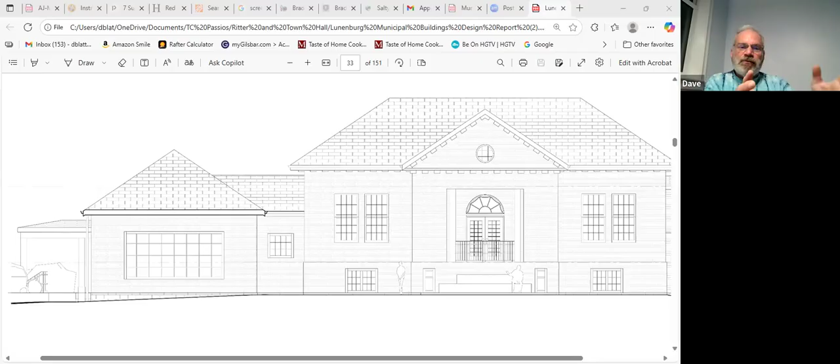I don't know, but Tony, I like the idea of the wall matching the roof lines. My biggest problem with the annex is it looks like a separate building. It doesn't look like it was meant to be part of Ritter. And having the roof line be cohesive, having it look like it melts in, there's got to be a way. We got to be able to figure this out. And I don't think the cost would be that staggering on this whole thing. I'd like to try to avoid having 3 levels, whatever we do, if we can. And I'm gonna leave it at that.

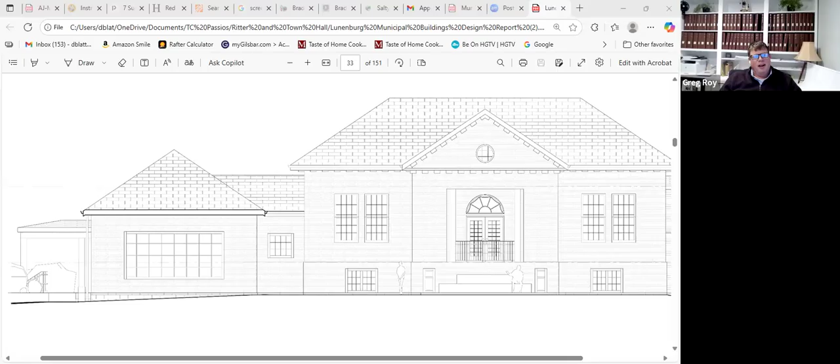And I just think we need to know what our total square footage is, because that's gonna inform our decision. Okay. When I'm sitting around enjoying an adult beverage in the backyard, I will go through the square footage things that were given to us and try to put together something for you guys to look at for our next meeting. I think a lot of those square footage things were wants and not needs, though. I agree with you, but it's basically what they're living with today, what they have today, as we look at things.

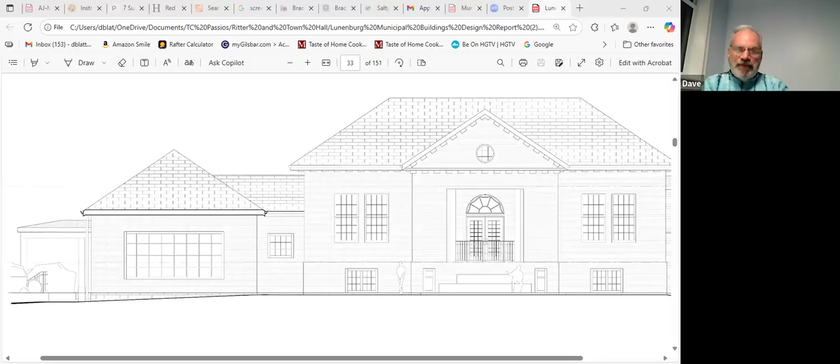And once again, if we're grouping people together and there's no walls, that square footage becomes a different number. Absolutely. Right? Because more square footage looks lousy when you have a wall. If there's no wall, it looks like an open area. Right? Isn't that why every office does cubicles? To make you feel like you have something.

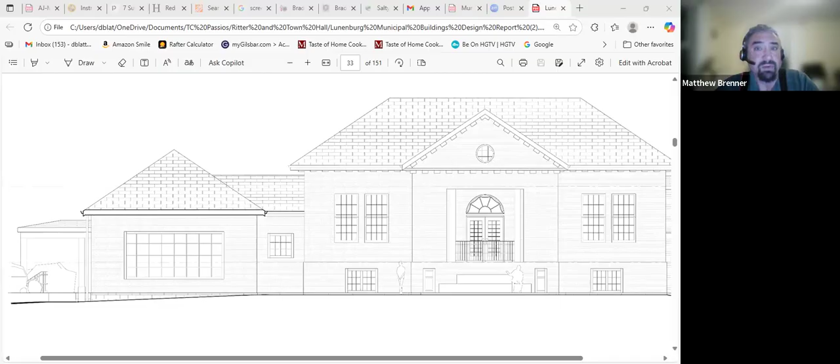Dave, speaking with the town manager during the building walkthroughs, she seemed to have a different vision of how much bullpen there would be than we may have discussed on this committee. I might be misunderstanding our discussion here, but a lot of the town offices can operate in some smaller sub-bullpens, but according to her, it wouldn't necessarily work to have many of the offices in a collective bullpen. Land use could certainly bullpen it up much more than it is now. But it seems like clusters was one of the things she had a lot of ideas about, how to organize the space.

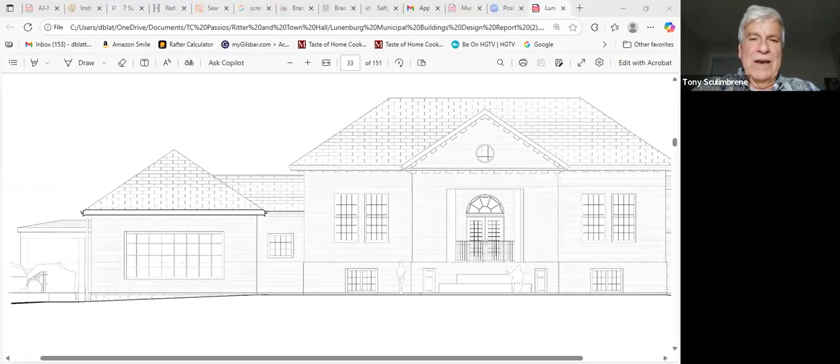And Dave, what I'd ask is that maybe Chris Roth and Jennifer do this bubble drawing, not necessarily put dimensions to it, but just to say this is where the head of the Board of Assessors sits, this is where the treasurer sits, and then link where the people are and the linkage between the different departments. It doesn't have to be an architectural drawing, but I think we really need to see that, because then we would have the bodies and the seats that we've got to find the space for.

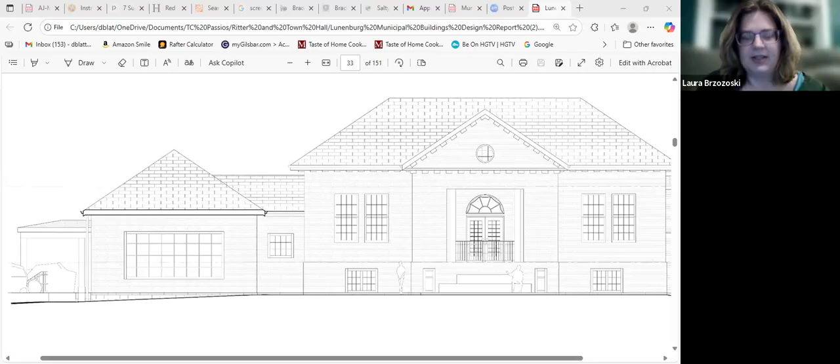If you want me to meet with the town manager and come up with that, I get what you're saying. That was what I was thinking too, like pieces of paper, some of them linked, that you can move around to just visually see roughly how much space, on a scale of 1 to 3, and who needs offices and who needs to stick together. I think I have time to do that. Is Chris still on the line? Because he did that for a living, I believe. Yeah, I'm still on the line. Chris, I think you could be a big help to Jennifer in doing that layout. Yeah, I can try and get some time with Jen and see what we can come up with.

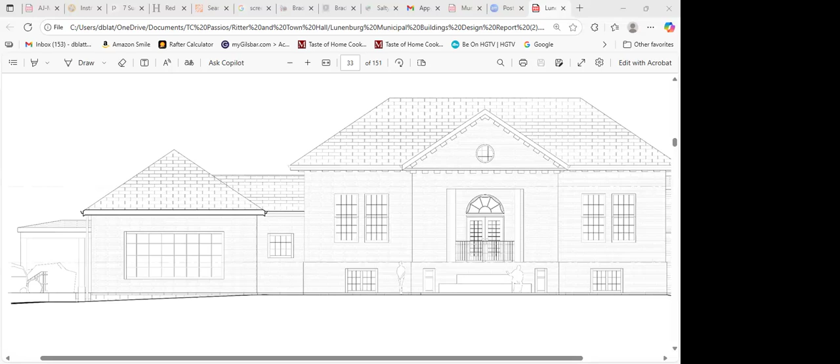Land use is easy. They kind of stick together. Some of the accounting functions shouldn't be the way they are now. I know they wanted assessors separate. Accounting can be very different than the tax collector; it's really what's public facing and what's not. And even if we end up with multiple levels, an office like mine, besides the people on this call, no one just walks into my office. So there's quite a few offices. IT could be hidden in the basement. You can take all the stuff that's not public facing and put it in the more difficult areas to get to. If the goal is to save Ritter, it's going to be tough.

Okay. Yeah, I think we should go through and get that list. I have some notes on it, but I want to make sure it's correct, and run through offices and who's with who, who should be with who, and who could be with who. Because the tour was a lot of useful information about that.

Mr. Chair, the other thing I think we need to do is reaffirm that we still want one building for the town functions. Is that still the case? Yes. Because what we heard from Jen was, well, she liked that, but she also mentioned you could have somebody over at the fire station and police station, because they work together on a lot of things. So the question is, for the cost, if we didn't need to add a lot of square footage and could reutilize the current town hall for certain things, that could drive our costs down. So there's a want and a need. Is it a want or is it a need?